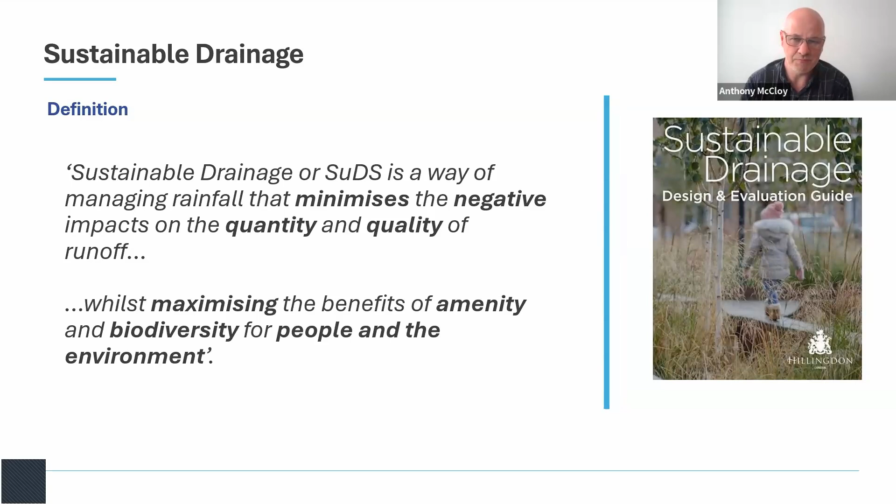So that's it in a more graphical context. And really, I've found over the years, it requires certainly a different mindset. You're looking for different opportunities. But I am seeing the new generation coming through are very much up for the challenge. I have found in the past, there have been a few resistors in the industry, generally people who have been doing it one way for their whole career and suddenly somebody comes along and says, well, actually, that way doesn't work. It doesn't achieve all of these other things. We need to think about it differently. You do find that you meet resistance.

There's a bit of inertia, but I do find that the younger graduates we have coming into the company and others I've met throughout the industry through UDG Group and elsewhere, they're very much this is our future. We want to make it better and we want to maximize, and they're excited about that opportunity. So I hope that the audience here today are as well. Michael, next slide.

So just to recap, we're probably all well au fait with the way we conventionally capture rainwater in our urban systems. So it comes onto hard surfaces. We have gutter lines, we have points where we'll direct rainwater, and then it will go into a small opening, so a channel or a gully pot down into the pipe. We find with that gully pot, a lot of the time where we have really intense rainfall or steep slopes, water doesn't actually enter it. It skips over. There's a hydraulic jump, or the gully pot may not have been maintained for the last 5 years and it's completely full of silt and acting as its own bioretention, but not letting any water through it.

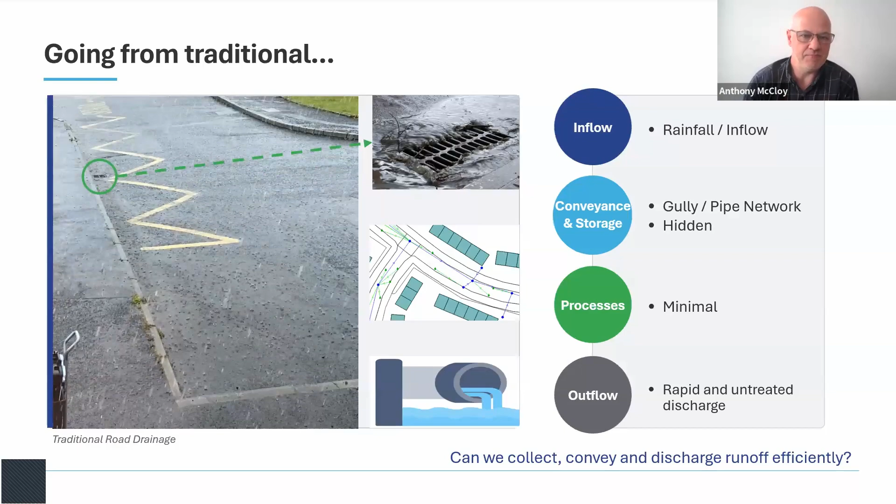So this is a scheme, and Michael will probably chat about it later on, so I'll not spend too much detail on it, where all of the landscape in this residential community was very much conventionally drained. The scheme was not focused on flooding, it was focused on water quality. The water course that receives runoff from that big, massive residential area is quite small. It is heavily polluted. It doesn't achieve its water quality status. And they were looking at ways of rejuvenating that water course by improving the water quality.

So you can see that it's more than just one driver here. There can be multiple drivers, and depending very much where you get the funding, maybe that's where your focus is, but you shouldn't lose focus on all of the other things. So it's very much a multifunctional thought process: you're trying to do lots of things. You're trying to do them everywhere all at the same time.

So it's very much looking right across the catchment, looking at every opportunity you can to do things at source, looking at things that will multiply up in terms of, well, do we actually need to do better placemaking in this area? Is there need for traffic calming measures? Is there need for rationalization of parking spaces? Are we getting active travel involved? So it's looking at how we combine all of those things to be multifunctional, but then also, as we're doing that, get betterment in terms of how we manage rainwater and do that all as part of one parcel.

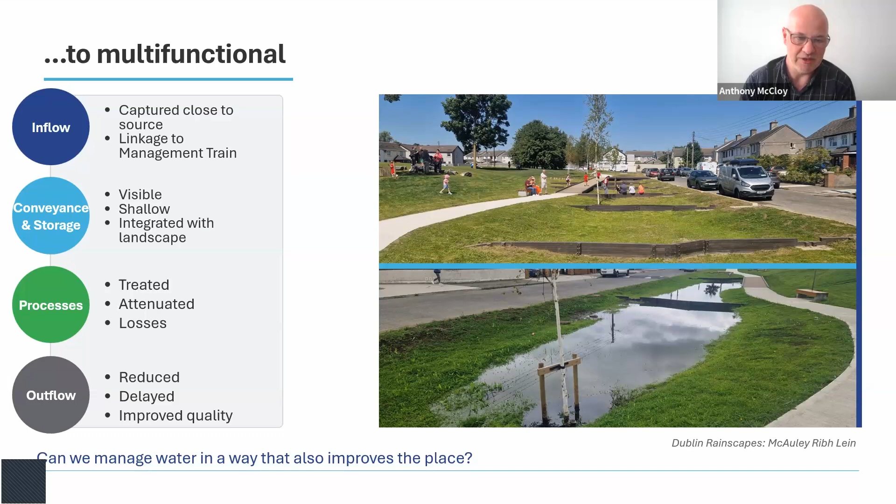So we have to be really sympathetic in terms of existing landscapes and the host landscape, particularly in SuDS retrofit, so that these are not heavily engineered schemes. These are things that add value to the community, and the community, if you do it properly, absolutely love it. They think it's fantastic and they want more of it. So as a design community and hydraulic modelers and engineers, we need to ensure that we don't impact that process. We keep delivering things that add betterment, that add value.

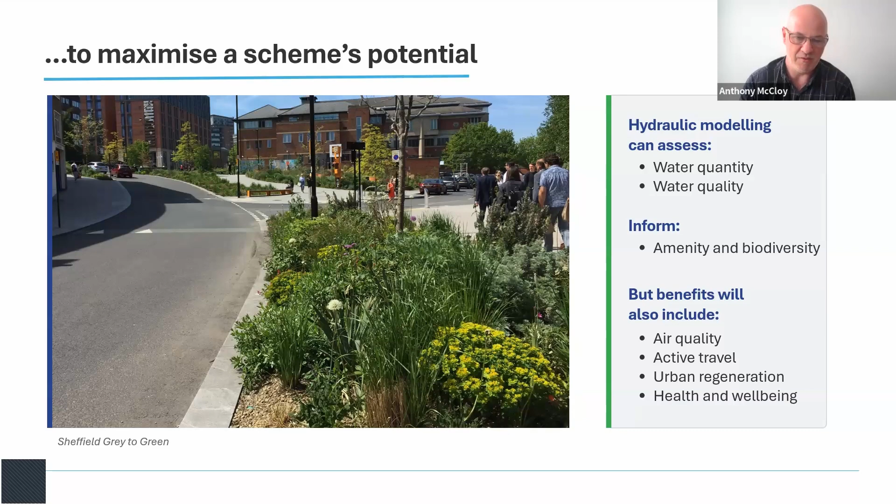We sometimes approach it very much from a narrow viewpoint of things we're trying to deliver in terms of flow reductions. Thinking about a wider context in terms of interception losses and how we can lose water across an urban landscape, and slow that water right down from the point it's collected and hits the ground, because that improves urban cooling. It improves the water quality in terms of the time of retention as water moves through the system, whilst also giving that provision and making opportunity for nature. So it's that realization that we have an integral part to play, but there's a much bigger picture there as well.

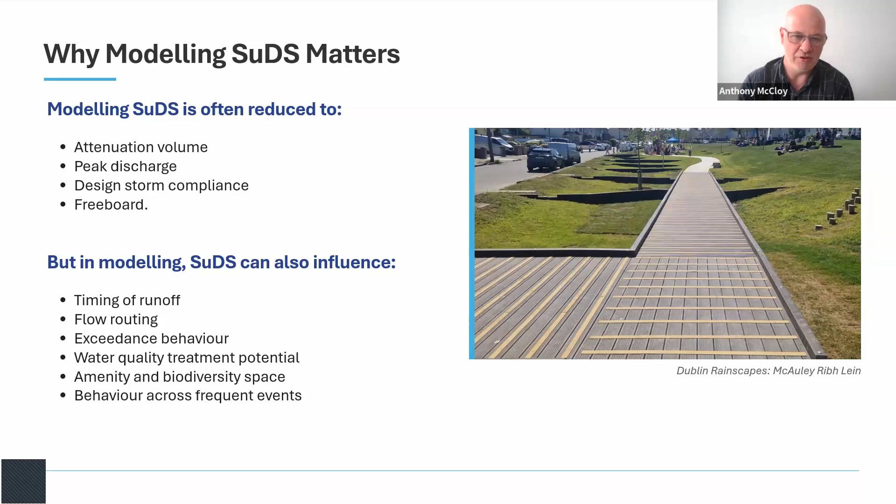Thank you, Anthony. So this section I'm going to go through is about how SuDS can be considered within hydraulic models. The key point I want to make is that modeling SuDS should not just be about asking, does it store enough water? Does it restrict flow to the targeted discharge rate? Those are important questions, of course, but they're not the entire picture, as Anthony's pointed out. A useful model should also help us understand how the SuDS work, where the water is coming from, if that water can reach the feature, how it is stored and conveyed, what assumptions matter, and where the water goes if the system exceeds.

So I'm going to look at representation of SuDS, different modeling scales, assumptions, and a few practical examples using case studies, using Causeway Flow for a 1D drainage model, and InfoWorks ICM as a 1D-2D catchment scale model.

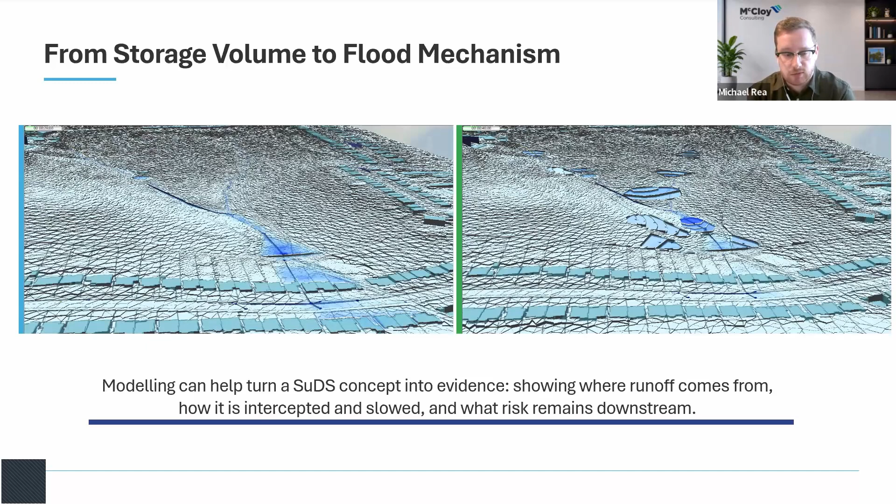It helps put confidence behind the design. It shows that change in flood mechanism and provides evidence for stakeholders, such as a statutory body, the public themselves, or in this case, funding an outline business case. So instead of simply saying we have added SuDS, the model helps demonstrate what the SuDS actually does.

So if we break modeling into 4 parts of what we're actually trying to represent, first is inflow. What water is the system receiving, whether it's direct rainfall or overland exceedance? Is it feasibly direct, or are there complex mechanisms happening prior to the flow reaching the feature? Second is conveyance and storage. How is that water being moved and stored?

Third is processes. So what happens to the water while it's in the system itself? That might include infiltration losses or other stuff that can just slow it down. And fourth is outflow. How does water leave? Is it controlled via flow control, discharging to a pipe network or overground, or is it making a surcharge outfall in, say, a watercourse? And that framework works whether we're looking at a 1D site-scale drainage model or a 1D-2D catchment model. The level of detail changes, but the basic questions stay the same.

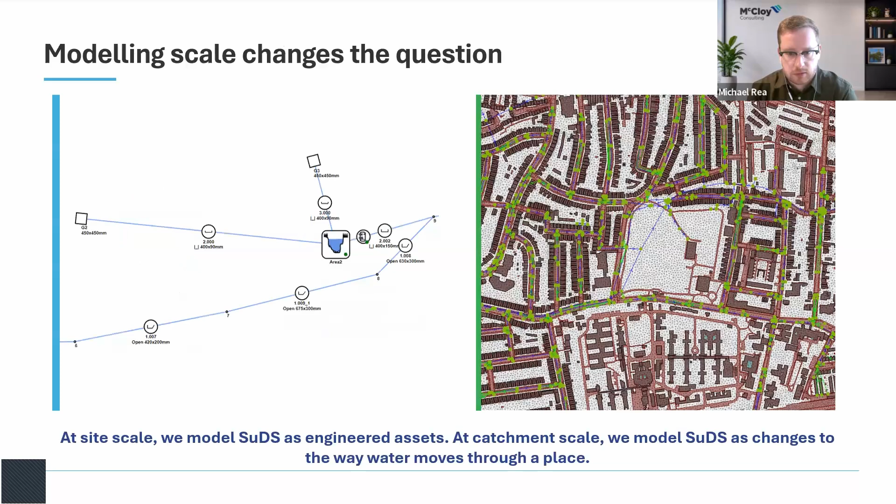So one of the key things is scale. At site scale, particularly in a 1D drainage model, we often treat SuDS as engineered assets. We have a pretty good understanding of inflow. We're asking whether there's enough storage, whether controls are sized correctly, and whether water levels and discharge rates meet the required standard. The strength of a 1D model is that it's relatively quick to build and run, and it's well suited to test storage volumes, flow controls, critical storm durations, and compliance requirements.

But the main limitation is that overland routing and exceedance behavior can't be simplified unless it's linked to a form of surface representation, and even then it's still quite a simple representation. Moving over, at a larger scale, say a catchment 1D-2D model, the question's a bit broader. We're asking how SuDS intercepts and changes the way water moves through the area. That might mean testing whether water can physically reach the feature, whether an overland flow route is diverted or slowed, and what happens when the system is exceeded.

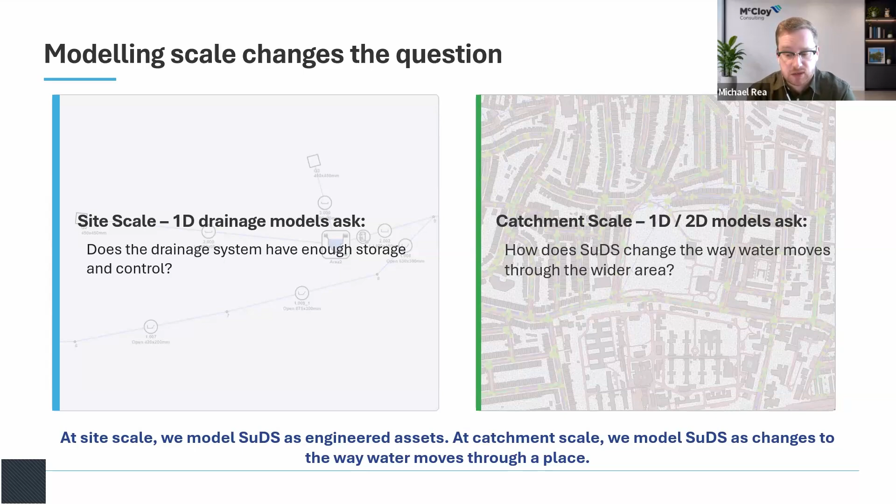The strength of a 1D-2D model is that it can represent surface flow routes, low points, exceedance pathways, and wider flood mechanisms. But the limitation is that it's much more data intensive, run times are significantly longer, and smaller SuDS features may need to be simplified because they're below the resolution or accuracy of the ground model. So at one scale, the SuDS feature is mainly a storage and control asset. At another scale, it's part of the wider flood mechanism.

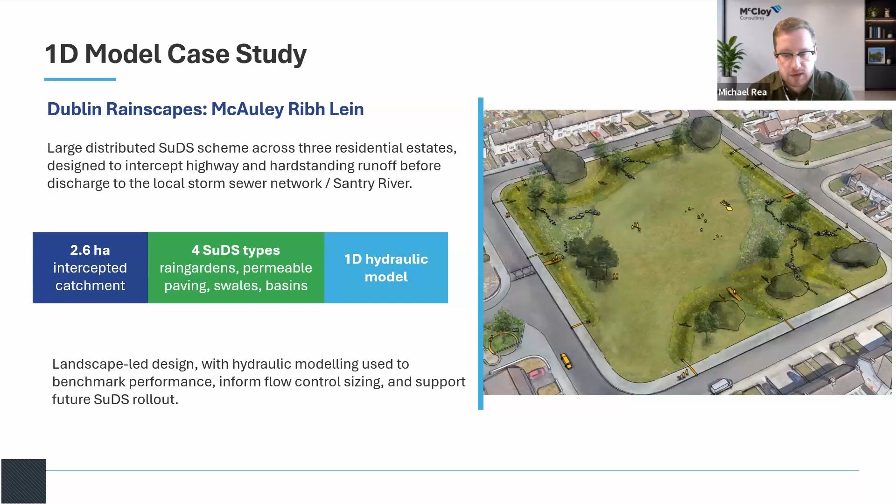As an example of a 1D drainage model implementing SuDS, the first case study that Anthony mentioned before was McAuley, as part of the Dublin Rainscapes project, modeled using Causeway Flow. This was the first and largest of 5 pilot sites commissioned by Dublin City Council to reach construction, with the aim of improving water quality as well as helping manage quantity of runoff within the River Santry catchment. It was a distributed SuDS scheme across 3 residential estates designed to intercept highway and hard-standing runoff before being discharged to the local storm sewer network and ultimately towards the watercourse.

The key point here is that SuDS were not designed as isolated features. They were formed as part of a management train, with runoff passing through a sequence of rain gardens, permeable paving, swales and basins before its eventual outlet. In total, the scheme intercepted about 2.6 hectares. The design itself was landscape-led, so the hydraulic modeling was not the whole design process, but it helped to benchmark performance, inform the flow control sizing, and support the case for wider SuDS rollout. So this is a good example of a 1D model being used to test how a distributed management train performs, rather than simply checking whether a single attenuation tank has enough storage.

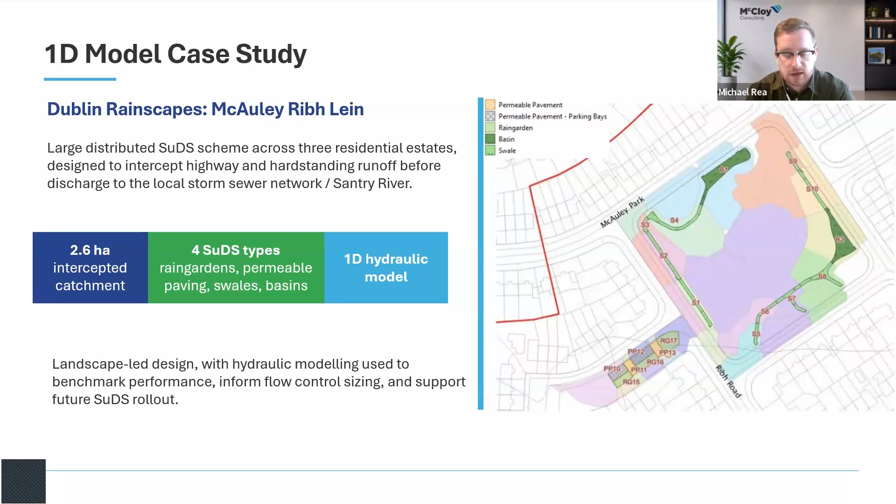This slide shows how the physical SuDS features were translated into the model. I won't read each row, but for example, rain gardens were represented using depth-area storage. That included the surface storage, but also the storage within the soil strata and the porosity there. Interception losses were also represented to capture the first 20 millimeters of rainfall entering the feature at the start of the run. That's about 10% of the topsoil depth. The reason that matters is that interception losses represent the volume of runoff entering the SuDS system that then doesn't leave through the flow control.

For another scheme we did quite a few years ago at Bridget George Square, or Australia Road as it was first called, interception losses, as the planting became more and more established, significantly reduced the amount of rainfall that was required before an outflow was even measured in the downstream manhole. So this model itself was still a simplification, but it's trying to reflect the actual behavior of the SuDS: where water is stored, where it'll be lost, how those features connect and interact with each other, and how the water eventually discharges.

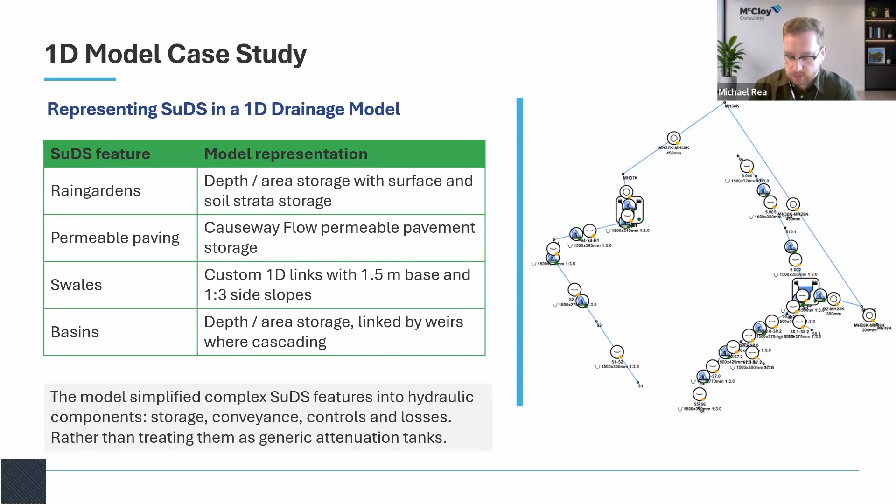The model at McAuley helped to show that performance was not just about total storage volume. Feature type, connectivity, available volume, loss assumptions, and critical duration all influence the results. One important finding was that linked features performed much more strongly than isolated units, which reinforced the idea that SuDS often work best as a management train.

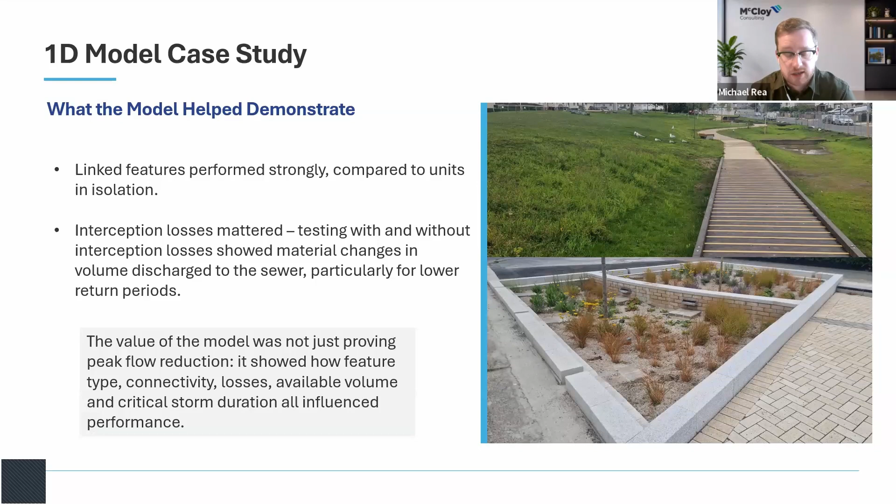Another key point was that the interception losses mattered. Testing with and without losses changed the predicted volume reaching the sewer, particularly in the lower return period events.

So to demonstrate a SuDS retrofit in an urban setting with a 1D-2D ICM model, we've got a second case study located in Larkspur Close in Haringey. So this was a retrofit SuDS scheme supporting an outline business case, and the aim of it was to use SuDS as a targeted relief measure in an urban environment.

The scheme intercepted a relatively small direct catchment, around 0.2 hectares, but it was also intercepting two main overland flow routes of urban exceedance and surface runoff down gradient in the catchment down the Jellicoe and Fryat roads. The site itself also had the added complication of surcharge in the watercourse to the south of the site. The bank walls were higher than the main body of the site, so discharge was limited from the site at high stage in the river.

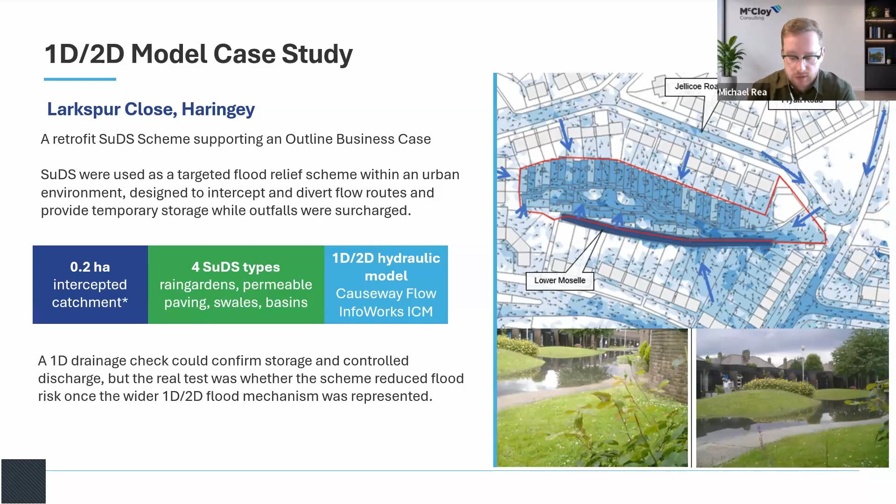So just briefly, the solution for the site was to divert the existing flow routes on the Jellicoe and Fryat roads using raised tables on the road and gullies to capture that runoff. And those gullies outlet into a swale and eventually into a basin, providing temporary storage with direct outfall to the watercourse down gradient. And within the site itself, permeable pavement and rain gardens provided temporary storage for the direct catchment at times of surcharge. So just giving a place for the water to sit and store before it can discharge.

In the 1D-2D model, elements such as rain gardens and permeable pavement were represented using 1D storage connected to the 2D surface. The benefit of this was being able to model the substrata volume storage by altering the volume basin porosity. And the basin conveyance routes were represented by edits to the 2D ground model, so the model can test how water moved through the scheme. Flow controls were also represented using orifices and overflow weirs. And the outfalls were also important. The full catchment was simulated to represent how water was being influenced by downstream conditions. So the wider model was needed to test not just the feature capacity, but the full flood mechanism.

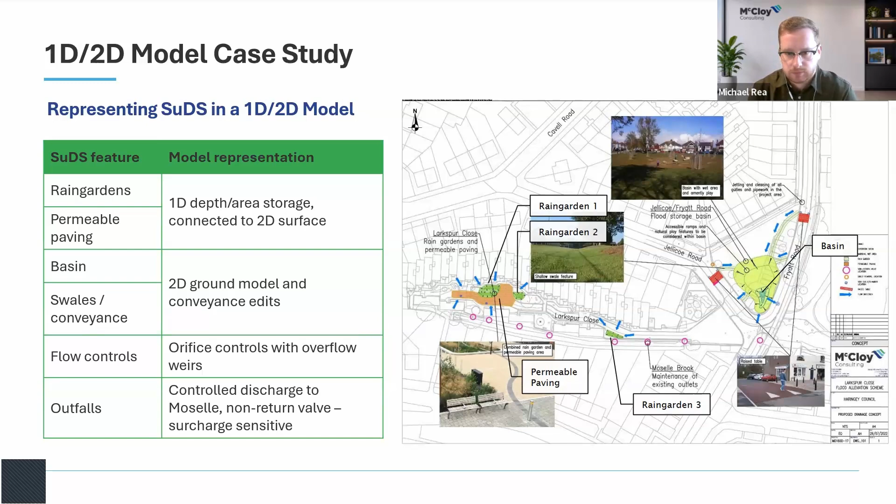And so the 1D-2D model helped show both the benefit and the limitations of the scheme. The scheme changed the flood mechanism by intercepting upstream overland flows and providing temporary storage on the site at times of surcharge. The benefits were strongest in the frequent, more nuisance events. The model showed an average property depth reduction of about 150 millimeters in the 20-year event, reducing to only about 40 in the 75-year event. And that pattern's important. It shows the scheme was useful, but also became overwhelmed in larger events.

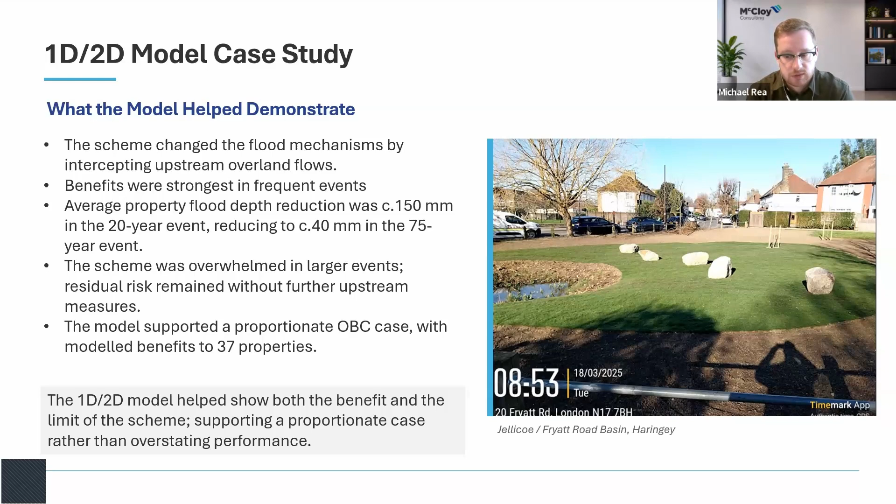So the modeling supported a proportionate outline business case with modeled benefits to 37 properties, whilst also making residual risk clear. And to deal with the residual risk, it recommended implementation of catchment-wide SuDS to reduce peak flows within the watercourse and wider storm systems.

And so the design storm is not the whole story. A lot of drainage design quite understandably focuses on the design event. We need to know what event sizes the storage, what the peak water level is, whether there's enough freeboard, and whether the system meets the required standard. But with SuDS, the design event doesn't need to be the whole story. These systems also need to work day to day. They'll need to deal with regular rainfall, first flush runoff, and everyday wetting and drying that actually shapes how the space performs. And that's where landscape design becomes really important.

So for this example, the SuDS were integrated into the public realm. In smaller but more regular events, water may only wet the lower part of this feature. But additional capacity is still built into the landscape for larger design events. So the space can function day to day without feeling like flood storage, while still providing that extra hydraulic capacity when it's needed.

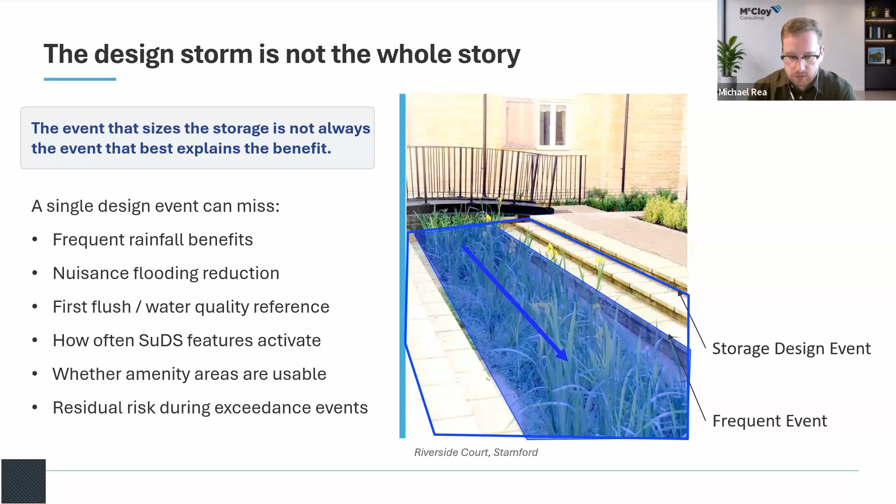And just to finish up, SuDS modeling depends on assumptions. That can be from inflow hydrology, losses to infiltration, how vegetated it is, the stage of that vegetation, if it's established or newly replanted, roughness and outfall conditions, and any other external factors.

The performance of the SuDS system will change season to season, as we've found in monitoring exercises on Bridget Joyce Square previously. The answer is not to pretend those uncertainties don't exist. The answer is to make the important assumptions visible and test them where they matter, and communicate to the client or the stakeholders how things will change through time.

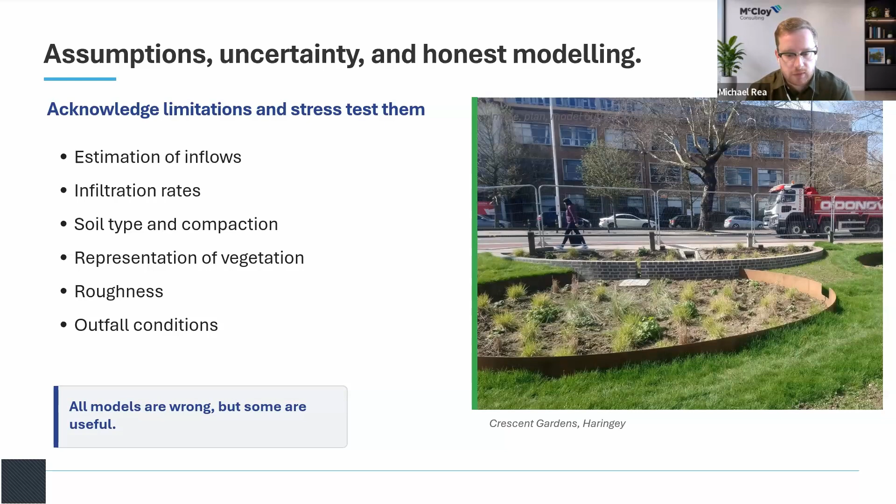That might mean testing with and without infiltration, testing with more initial losses, increasing or decreasing roughness, or considering reduced outlet capacity. A useful model is not one with no assumptions. It's one where those assumptions are clear, proportionate, and explained. And of course, caveated with the all too familiar: all models are wrong, but some are useful.